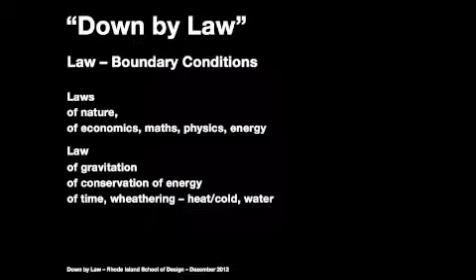How do buildings age? How do we project a city to age or a city to transform in the longer run? So the law I have extended to laws of invisible limits, and I would like to make it specifically before or beyond the formal, because we're trained very well to answer formally how we take a stand towards a project design job, but I think we have to go beyond that.

We have to take a stand on many more issues than just design, and I think that's also ground that we architects have to occupy, because the real estate and the building industry is a heavy industry, and we shouldn't be reduced to just being the guys who do the icing for the cake, but we should really know how to bake the cake and what the ingredients have to do within a cake when it's in the oven.

So the question would be, is the law or the laws, shall it be legal issues, shall it be laws of nature, is this a constraint? Is it a straitjacket? Is it something that makes our work heavy? Or is it a playground? Is it a playground to find niches of intervention? Is it a playground that actually just is a starting point to set out on the voyage for a project? And are laws absolute or are they relative?

They always are dealing, I think on any scale, between public and private interest, in invisible acts of intervention, acts of intervention over time. As I said, the projects have spans that sometimes go beyond a lifetime. It can be from the city fabric to the community, to the neighborhood, to the house, or vice versa. And at the same time, this negotiation for the intervention is the cultural act that we architects are very privileged to contribute, and that's where I also think it's important that we do take a stand.

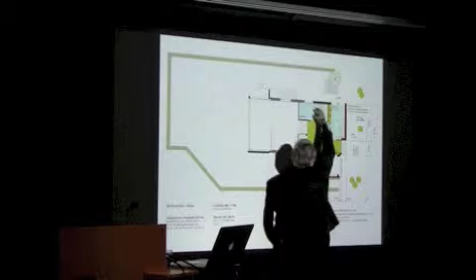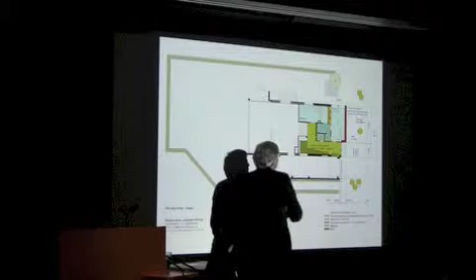So I had a very hard time working with the existing structure to gain 2 extra children's bedrooms with their own bathroom. We had to replace the entrance, which was in the middle. We moved it on the side to have a big wardrobe. But there was a moment when Jan was very dissatisfied because all the structural interventions cost so much money that he felt he doesn't get enough room for the money he invests.

My fee sort of was exploited. I was getting unhappy doing all the work and he's not happy with the job. So eventually we had a phone call, and the phone call resulted in us shouting at each other. I got very upset because he had criticized my work attitude proposing the intervention into the structure, which touched me emotionally very much, and I just burst out,

Jan, the only thing that we could do for you to satisfy would be, we forget about the shit we have done so far. You don't want an extension in your house, we just do a provisional project. Your kids are now teenagers, they'll move out in 7 years, we do a project for 7 years' time, and then you throw the wooden bin away. There was a silence on the other side for about 30 seconds.

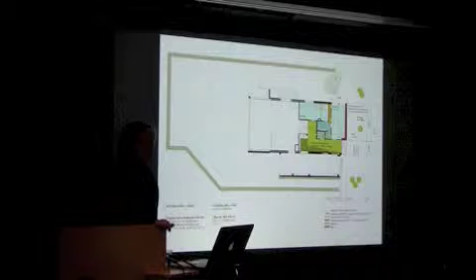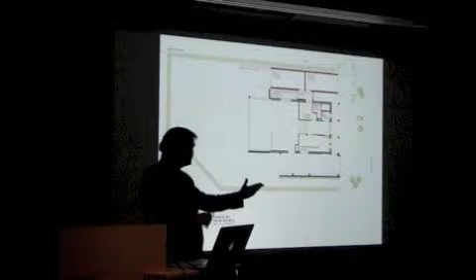Stephan, that's what we're doing, that's a great idea. So I started negotiating with the community to say, look, this guy's got a family problem, he needs extra rooms, he's your village doctor. He doesn't need that for the whole future life of this house, but he needs it urgently for the time now.

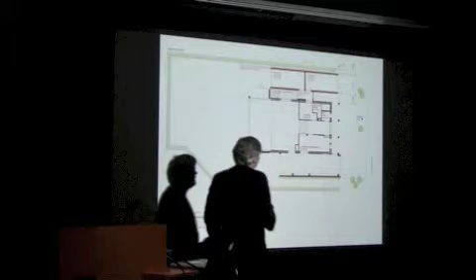And I could negotiate with the community to get a permit of exception for a provisional building for 7 years, which eventually was this volume that we could add laterally. We could keep all the existing structure, which basically saved the money so we could already buy the prefab element.

I decided to go to, if I translate it to English, a box factory. It was a manufacturer who had a reputation to ship big machines from the machine industry in Switzerland overseas. And they started doing prefab houses, so I said, I'll just buy a wooden box. We dimensioned it to whatever we could squeeze in the garden.

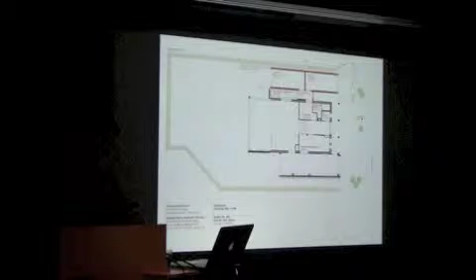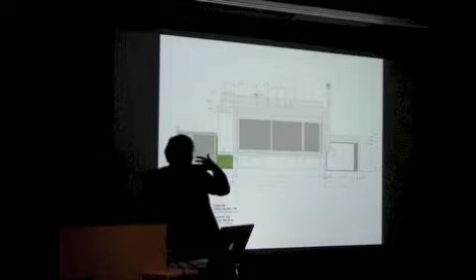The community said the green line, the hedge, we should not touch, but we can build up to the hedge, which basically dimensioned the space that I could bring in the rooms. And with the provisional permit for 7 years, we got the go-ahead. And in a way, it completed the conception of the first phase, having a box, if I may say so, in front, which was the living room added.

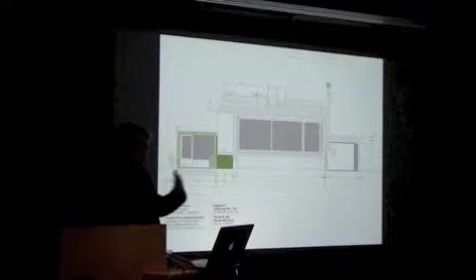On the one side, the garage element added. And now, for the limited time period, the provisional children's room. And he's really thinking now, maybe he might ask the community for an extra 2 or 3 years, but he already has plans what he could do with the box once it has expired its lifetime.

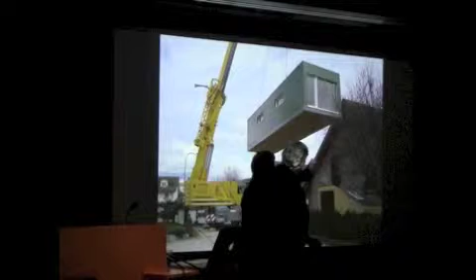And what was exciting really was the way of construction. The box was prefabbed in the factory. We went to see that. There is a sort of a joint piece that covers the external stair going down to the cellar. This would be the entrance into the existing house. We also had to watch that when they lift in the box, they don't break away the roof. So this sort of distance box helped us with that.

The foundation was very simple. It was 12 holes with cement cylinders filled with concrete, put the box on it, and within about 3 days they could use the boxes. The inside took a bit more, but within 3 days, the girls had their rooms, and the girls were really, really happy with it.

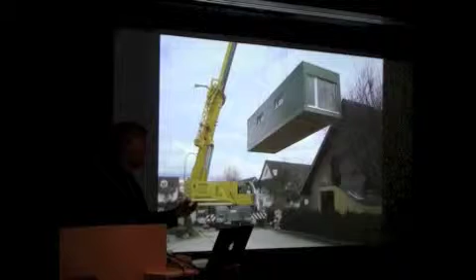The whole box is a very simple construction of OSB board beams, and the OSB board is sort of waterproof and vapor dense, so that was just cladded to both sides. The outside was painted green to fit the buxus hedge, and the inside I left OSB also because I thought teenagers, they want once a black room, pink room, and both girls were very happy that they could do whatever they wanted with the room because that's going to move away, and the parents let them do it because it wasn't the house, it was just the provisional building. And so that's how we solved the borderline issue.

The next project is skipping in scale completely, which is probably the largest building site in Zurich. There was a short list of 8 teams to look at the development site called Glattpark, that's in between Zurich on the way to the airport. Glattpark is a huge development area where they try to place international firms. Kraft Foods is there now. They try to house people there. And the original project had

anticipated 3 phases. And the city wanted to have a test of the special zoning law they had put in place. There was a lot of pre-planning to start the project. And when they eventually started, they realized that the guidelines, you'll see that later on, weren't what would start the site. So in order to be able to start to construct, they started to give themselves special permits beyond the new building rules to be able to start to develop.

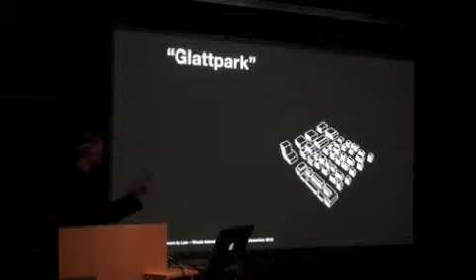And then the community thought that it might be advisable before they start the second phase to retest the special zoning law that they put in place and see how that could be adjusted to maybe make a better total development. For me, that is going on the law and exception. You have something that is installed as a special zoning law, but to start it, you already have to give the exception to the exception building law, which is somehow a very awkward situation.

I said it was a public client, the biggest development site sort of in the area of Switzerland, phase 1 nearing completion, and the building permit was based on exceptions to start development at all.

And what we were trying to do is, I worked with a landscape architect, and in our collaboration we were immediately convinced that we have to take not the law as it was given as our guideline, but to knit on what the first phase started doing, so that we would make it complete in that sense, and not to go into a game of right or wrong, but into a game of permanence, of whole.

And that's why we were using the ideas of knitwear, the pattern where you knit, but you have to deal with the edge, you have to deal with the arm, you have to deal with the neck. And that's probably the special parts, but we wanted to make it as a whole.

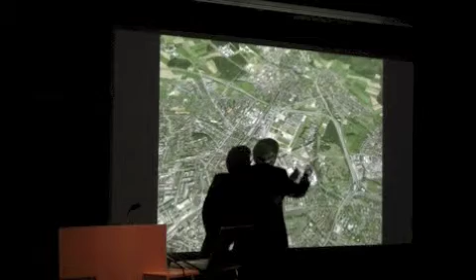This would be an aerial view, and if this is leaving the city of Zurich, and on top of the map would be the airport, it's all of this, with already a park that they had decided to reserve land, with an artificial lake that they started out, and the first phase would have been all of this, second phase here, and the third phase was this rest lot. And you see there is one big block, there are sort of linear buildings here, and then here several buildings, but they form chains towards the artificial lake.

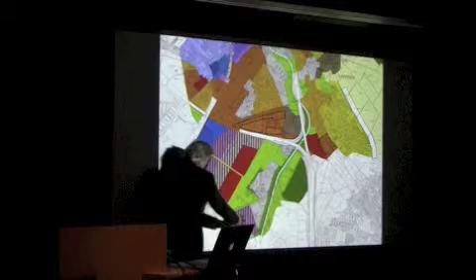This would be the legal plan behind the whole development, saying phase 1, phase 2, phase 3. For making a contribution to the public, the landowners had agreed with the city that they would do this park. It was an international competition. An office from Berlin had won that, and they were actually building the park and the pond before even the housing started.

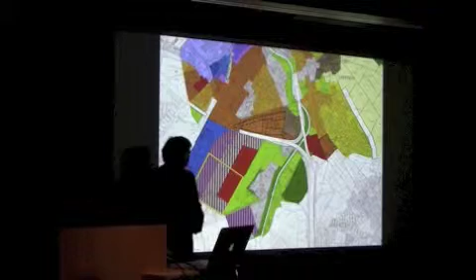Then they were thinking that what is red should be housing, the light blue should be mixed use, and the blue would be office space. And in the first phase it was already clear that all of the mixed zone was completely housing, because in Zurich they had programs of 10,000 flats a year. There are about 80,000 foreigners moving to Switzerland, which is, compared to 7 million people, a lot that the city has to digest every year.

And the office market had been saturated in the early 90s, so there is a lot of office space available, but housing is really a shortage, and basically you can build whatever you want and most of the projects go. So it's really important, even though real estate developers want to go fast, that you are sort of counter-working and try to achieve more than just the number of flats necessary.

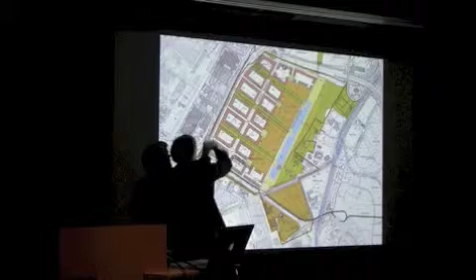And we found, to our surprise, that the city had wanted like a 19th century city with what we call in German Blockrand. I don't know the English expression, but perimeter block. Perimeter blocks, okay. Next to saying that it should be a perimeter block development, they had a linear axis with a boulevard and transversal connections from the park to extend the park landscape up to the heavy main road, where there are 3 or 4 lanes of traffic, and the new tram line that goes from the city out to the airport. So it's really growing fast.

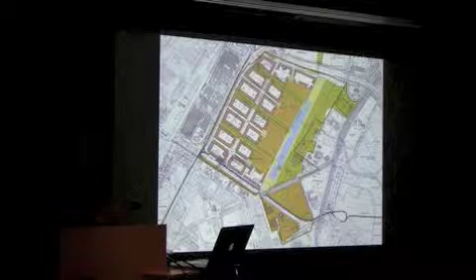There's a lot of traffic, and probably that was why they wanted to work with the perimeter blocks, but we were not satisfied in just using that fabric of definition of public space. We thought that the city has to achieve more than just building this pattern.

So what we did is, as I said, in terms of knitwear, we referred to a period of work by Issey Miyake in the 1970s, where he wanted to achieve clothing out of one piece of cloth. And we thought that was very challenging to understand. How do you have one piece with all its edges, with all its exceptions, but to have a fabric that goes to satisfy the whole development?

So when we started designing, the city had invited 3 teams, and 2 teams had already built on site, who were responsible for the housing that you saw up there. The study job was with intermediate presentations. And the strategy of these 2 offices was to do a second phase that would be completely different. Point houses, different densities, different park landscape.

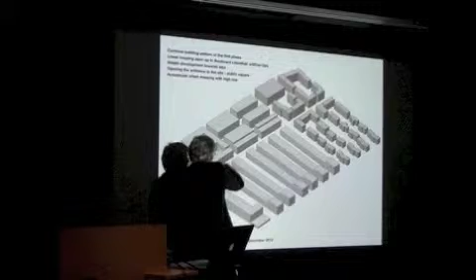And we thought that would be a strategy that makes phase 1, phase 2, phase 3, but the city itself wouldn't come together. So the first assumption we made was to say, where there is housing, we continue with the linear buildings that link the boulevard to the park. That should also make a link so that the public space of the boulevard gets more emphasis.

The second element was that we did not believe in the perimeter blocks, but started modulating volumes and surfaces that are much more occupiable for big companies if they want to do office space. So we had to have the notion of how can we care for office space that would actually be occupied or sold, and at the same time we tried to have a mix of functions.

So when this zone before was only for office, we also postulated that especially along the boulevard, these front blocks should be as well flat, so that if you're there as a citizen, you don't walk a street that is full of light on one hand at night and the other side is dark because people stop working there. And you see very well how we attach to the first phase that was mostly accomplished.

And then we started specifying the rules for these linear parts between the park and the Boulevard Lilienthal. And it's important that you understand these figures. These were never meant to be the buildings. These were meant to be envelopes. Envelopes in which a project has to behave, so that it's like a common rule of game.

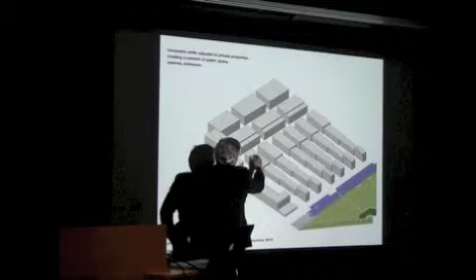If you have the front, you may do a project within this volume, but you can't set it here. You can't set it here. These parts could be deeper, but you can't occupy the public space. So basically these were like positive, negative shapes where we defined access, where we defined traffic, where we defined park areas, and volumes within which the square meters could eventually be consumed.

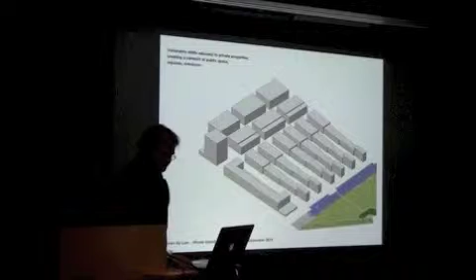Once we had done sort of the gross massing, we started overlaying it with the private properties, and you'll see an image later on, but all here, these are private perimeters. And we wanted to develop a strategy that each one building contributes to the whole, but the single landowner does not have to negotiate with his neighbor to start construction.

So we try to have something that is a total fabric and at the same time works for the individual, so that each investor would be independent on his own decisions to start building, to see what kind of building, and that's why it was important to adapt the massing and the reservation for building and public space exactly to the boundary lines of private property.

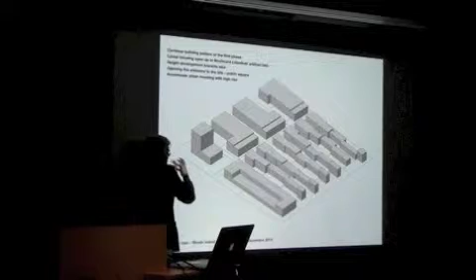And then one move that we thought was very, very important to us, we wanted to work the office mass with the high heavy traffic road, that at the entrance we wanted a much more public appearance for the city fabric. There were 2 new tram lines with important tram stops just right at the edge, and we didn't want to use the perimeter block to occupy up to the street front.

We wanted the mass of the building square meters that could be consumed to recess in a similar maneuver, probably like Mies van der Rohe's project in New York, that there is a public space in front of it and access into the area from a public space and not the street front. And then the final stage was the inscription of different building typologies into what we had defined as the urban massing.

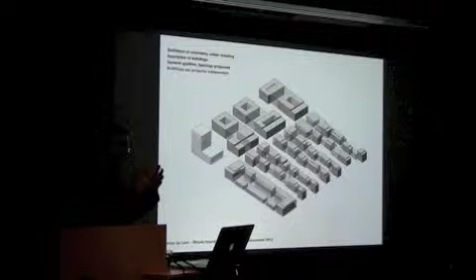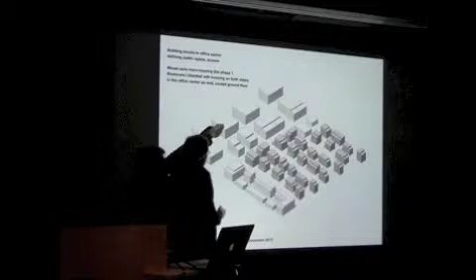Which eventually resulted in possible volumes within the building mass, trying to exploit view from the park. The original building code had foreseen that the highest building should be at the street and they should eventually step down towards the lake, and we thought there should be a better emphasis if what is at the lake could also go higher up. There is a great view into the mountains even, and we wanted to have more depth for these buildings so that there are always lateral or diagonal views possible for each building to participate in the wider range of a public space and not only what is happening just around the house.

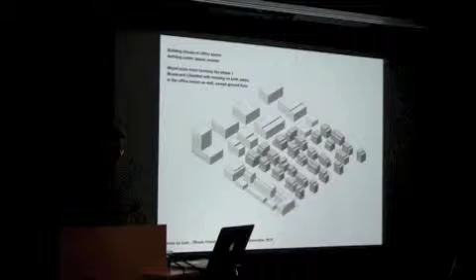So we tried to convince the city that it's a good strategy you started. If you do it by exception, that's fine, but you have to keep on knitting it to make it a whole with possible exceptions or extensions of the law of height, of creating the public space for the arrival area, and how the network of public space was extended with spaces in between the main office volumes for reservations of access to the car parks underground.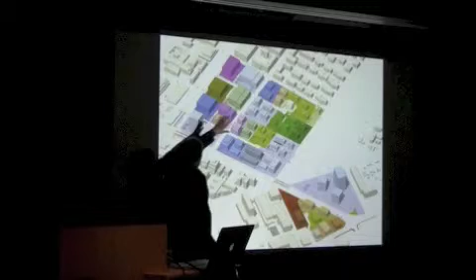But basically finish off the first phase with an extension, with decisions they had taken as exceptions, to apply this to the whole system. And then in the third phase, we thought this has nothing to do with the fabric that we wanted to be completed as a finished knitwear. So we decided to have a different strategy and treat especially this one like an island.

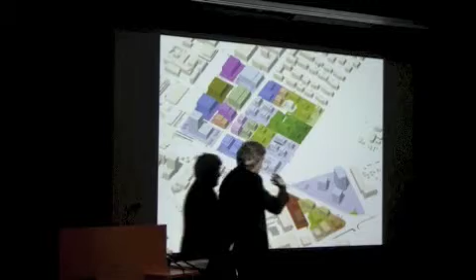We thought this could be heavily planted with trees and create like an artificial island with the high-rise office tower standing out there. And I think it shows pretty well how we tried to approach and make the whole area at the lake appear as one piece.

The city itself, they were very happy with all the results. They had seen two teams doing something completely different, and they realized that they had one proposal to continue knitting, and in the end they realized they couldn't change anything in the special zoning law because they did that job 2 or 3 years too late, and there was no time for the political process to actually change the law, and they just had to keep the special zoning law as they had installed it in the beginning and keep on building with special building permits as exceptions.

So the timing, basically, they were very interested in what they might learn, what they might do as exceptions, what architects might do as a solution, but the political time was not taken into consideration, and you could be mean and say they could have saved that money and invested it in more public space. But for us it was really very, very interesting work. And again, that's why I say this is probably before the formal.

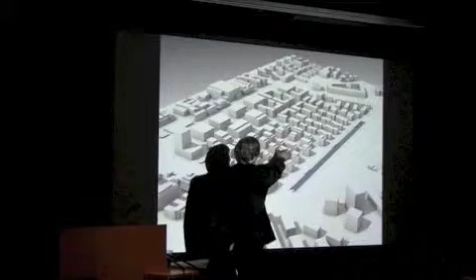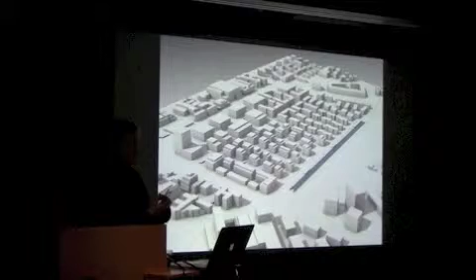Maybe one reference to the typology. What we wanted for this housing, compared to the first phase, we wanted a typology that on the first look looks the same, to strengthen the identity of the site, so that the attic should not be recessed all around. The attic should always reach at least 3 facades. Laterally, there should always be additions to formulate entrances, to formulate bicycle storage, to formulate kindergartens.

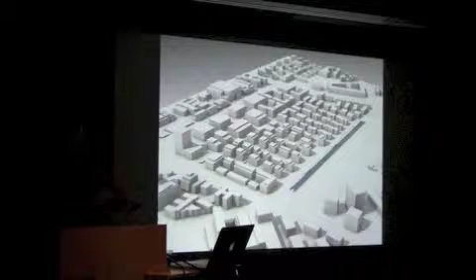But the typology, once established, would allow each house to combine these elements in a different way. So when you look at these buildings on a second look, you suddenly start to see the differences between the different elements. All right. So this was a work that we did probably during half a year. The city consulted, and the second phase is under construction.

The next project I'm going to show you is another political process. It's downtown Zurich. The project, though, the time of intervention is probably in a timeline that we won't get to see what we did. It's about inversion, it's about continuation of public space. The city of Zurich, or the Office for Urban Development, was the client, and Swiss Railway was involved, the local area representatives were involved, the people of public transport were involved, so there were about 12 different offices.

Green Zurich, which is the garden department or the public space department, was involved, and we were trying to negotiate in a very complex field a solution to have a site that could be understood as the entrance of Zurich. You will see immediately in the aerial view, which is actually an entrance, but it's the back side. There was an incision for the railway that was built in 1875 as the back borderline. There were building lines of the 1960s, and in the 1960s in Switzerland traffic engineers had also taken over urban development, so there were building lines reserved to have high frequency traffic right through the middle of Zurich.

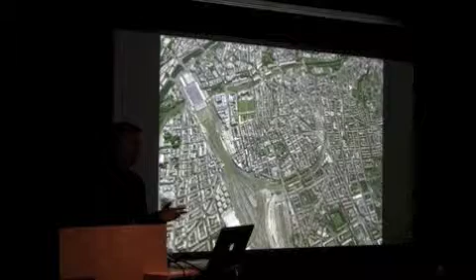Even though I think infrastructure, and that's something that I learned from Jose Acebillo when he did a great lecture at ETH, who said, you know, transformations and development of cities are not done by a single project. They're done by the right arrangement and the right development of infrastructure and public transport, because that's what dimensions the city.

So even the aerial view here, there's a few maps that say this is the sort of the city plan for the building code. The 5 stands for the maximum stories. A, B, C, D stands for special building depths that you're allowed to do. The blue are the building lines. So if you build a project here, you have to build with one facade onto the blue line. But at the same time, this seems a very clear starting point.

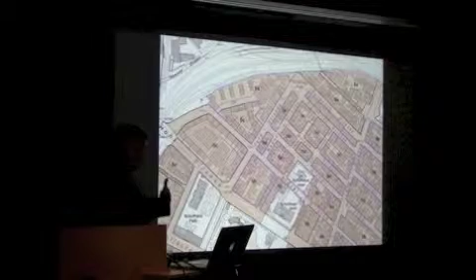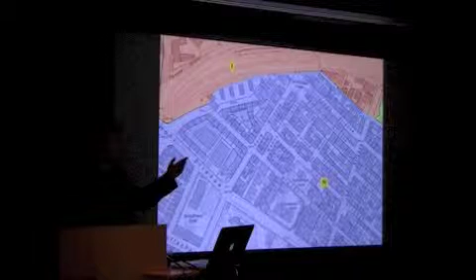At the same time, the same area is in what they call a high-rise zone. In the high-rise zones, there are 3 within Zurich. In high-rise zone 1, the height can be negotiated by the public project or by a competition contribution. In zone 3, high-rise can go up to 40 meters. And in Zurich, a high-rise is if the top slab is higher than 22 meters, you fall into the high-rise category, which basically is not very high.

So the question is, everybody would like to do a high-rise because it would allow you to consume more square meters. Now, how do you negotiate between the city fabric, the private who would like to have a high-rise, and the city who says you can have a high-rise if you contribute to the city? So it's a whole range of negotiation, and if you imagine this on a pattern again, overlay the city structure with private ownership, and you see how many different small portions of private property there were within this context. And it's very difficult to bring that many different interests under one thing of urban development.

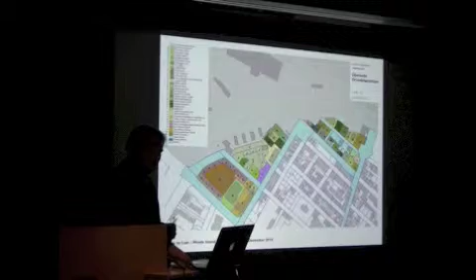So our starting point was the city plan, where you see the violet building line. That was a trajectory for basically, maybe not the highway, but on canton level, the most important hierarchy of street, which would have just cut through the whole area, eventually go through a tunnel and directly out of the city. And due to this legal intermixing between private ownership, building lines from the 1960s, there was no development in the area, because if you owned this house and you wanted to build, you couldn't, because you should be a street.

If you wanted to build this house, and the orange marks that this was not just a house, it was registered for heritage. So basically, if you wanted to build the highway, you had a fight between the people who said, no, no, you can't take this house down. This is heritage. You have to go around us, but you can't go around us because the street is where it has to be. So basically, it was a deadlock situation, and we intervened in that deadlock basically by using the engineer's plan.

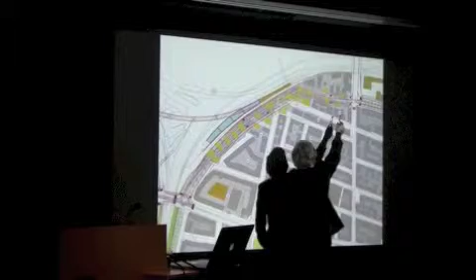The engineers had said, this is ideally what we have. We start from the train station. We have the first stop at the entrance of this area. We drive around with the ideal curves to have maybe a stop somewhere back here and drive out. And at that moment, speed was timed, property was timed, but there was not really an argument on the urban level, and we tried to help them exactly with that.

The first thing we did was looking at these maps. It is an instrument by the city of Zurich, where they look at the relationship between density of housing, square meters of housing, number of people, and how well they are in connection with public space, where everything yellow or light orange is good, the orange is just satisfying, red is bad, and the violet is very bad. So you see that for people who live here, at this area, even though all the railways arrive, they have classified it as completely unsatisfactory. There's a ratio of head per hectare that they have analyzed.

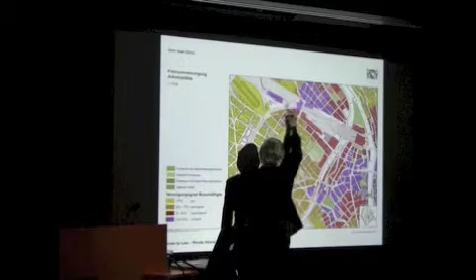The same map, if it's not for people who live there, but for people who work in the area, looks a bit better, but still, especially this area is rather critical.

And right now, the interest was, this area is now a big development. It's going to completely invert the city, and the piece that we looked at is somehow like the missing link to make the whole fabric complete. So we started arguing not by the speed of tram line, by the diameter of tram line, but we tried to argue with intervention.

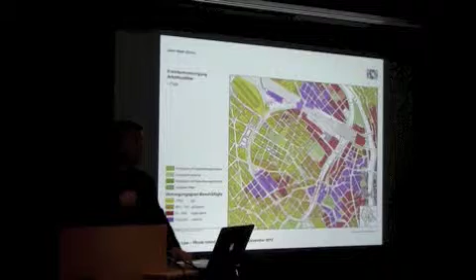And as a reference work, I would like to introduce the work by Roland Roos, Swiss artist. He has a series of work that he called free repair, which means if he goes through the city and finds a place where a hole has been dug out to do whatever underground needed, and it's been replaced in a funny order, he just goes and makes a free repair. And to me that was a very nice way to think about public space.

How can I take a stand of an intervention that is somehow invisible, somehow not authored by formalism, but authored by making something complete. And based on this work, you'll find more examples under rolandrose.net. We looked at a plan that Green Zurich, those guys who look into the public space, have established.

Zurich is a very green city. It's a network of alleys, and they call this the boulevard or the Alleenplan, where everywhere where there should be trees following up the road has been marked, has been labeled, but it's also the strategy plan.

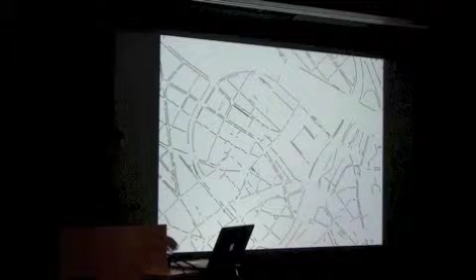And we thought we should make a free repair and just add in the extra circle to make this area a continuation of the public space, and somehow the incision that had been started in 1875 with the railway going here, that these alleys that are in place should just lead the way so that the whole area becomes a public promenade. And once arguing the public promenade, we had arguments to time the public transport, to time the tram stop, and basically constructed it.

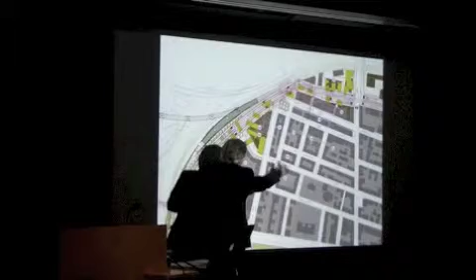We're looking at where would it be best if they need a tram stop, and place it very clearly in front of this building block, so that access would be immediately direct into the existing city fabric, and the different patterns of transport, the street pattern, the public transport pattern, started to overlap in a very orderly way.

And public space would be reserved with a wider range here for the tram stop to cater for a wider number of people, having the edge, since this is an incision, finalized by continuing, as I mentioned, these rows of trees until you enter into the city.

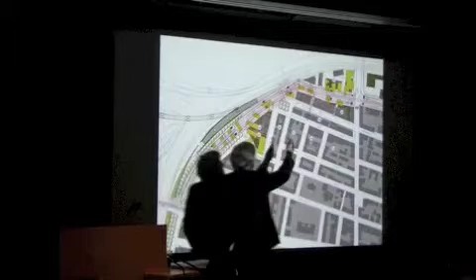And what was also good in terms of strategy is the city was very glad. We managed to slow down the tram line to a different curve, and it was very challenging for us to draw tram radiuses. I mean, we had hundreds of versions, and each version was a different speed, a different angle. We were really measuring how much of the existing fabric in this building block could actually be kept, and we managed not only to save this one, but we could even save the one building in front.

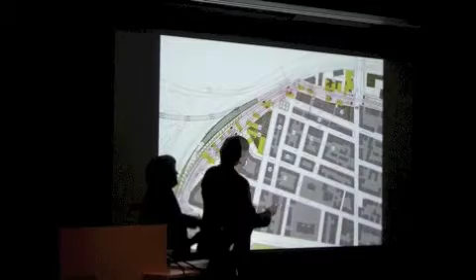And the yellow ones are the ones that either would have to go, or the ones where there were already projects that these buildings should be replaced. We presented it, and we could get the consent of, as I said, the Swiss Federal Railway, the public transport, the city development, Green Zurich. Everybody consented,

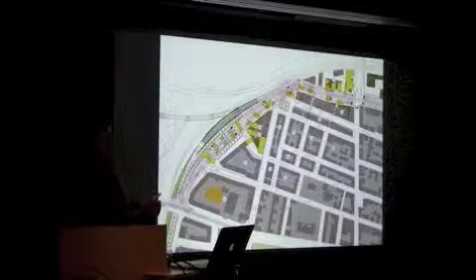except, and that's where this poster is from, the people who live there, because it is an intervention into their living neighborhood. And to change the building lines of the 1960s is a legal procedure. This goes into a public vote. And these people started saying, this is the real estate sharks, these are the people who want to drive the poor people out. And in a way, I have a very big sympathy with these people, because it is a transformation.

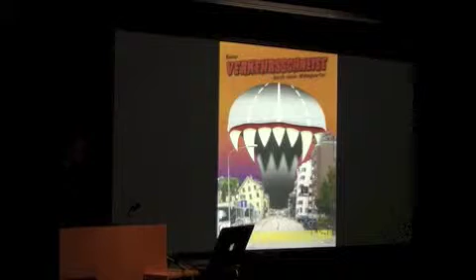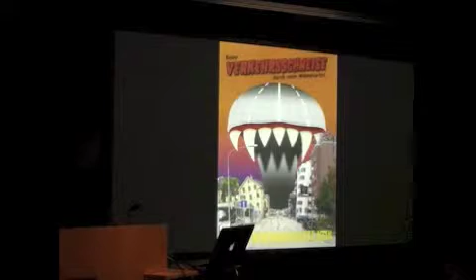But we thought that there was a lot of motivation, if you read the city structure, that it's about the network of public space that would install over time, and would be a contribution not only for the people who live there, but in a wider range to the development of the city of Zurich. So this is how it came to a vote, and eventually it passed. So this is going to be the new building lines. The first few developments have started now, because the deadlock had been ended. This part, which was already projects before, is taken down and is into development.

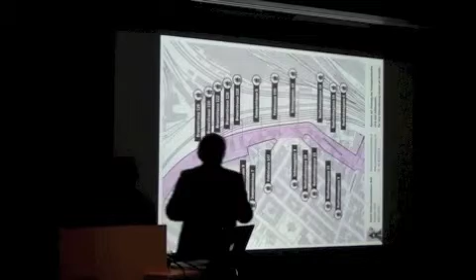Probably I should say this is how they had argued. This is how many houses have to go. But they secretly had also this line, and they didn't talk about the houses that were bound to go if you would realize according to the building lines of the 1960s. So it was actually an evaluation between what can we gain for the city of Zurich, and that was our argument. So eventually I was very happy that this free repair was the base for the new building lines.

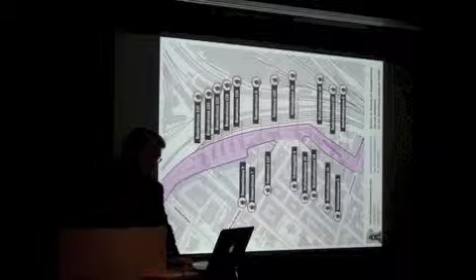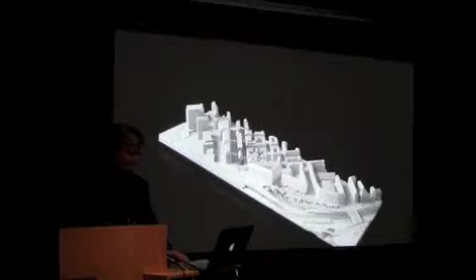And after these very large-scale interventions in public space, I would like to present you a last reference work from the work in the office, which is again under the title The City in the House, and that is sort of the dialogue I appreciate very much, always working in different scales, because the focus and the concentration on different questions is always enriching the discussion on different levels.

It's a private client. The private client had a site. He bought the land. You will see again the aerial views on a fantastic site above Lake of Zurich, with a view from the Alps to nearly the city of Zurich, the Lake of Zurich. It's all in front of you. But when we got to the site, which is up here, you see the Lake of Zurich. All of this development, or most of it, has happened in the last 20, 30 years. There is an incredible amount of building going on.

And our client had bought this property. So you have a very heavy Kantonstrasse in your back with a lot of trucks going by, steep uphill. So it's quite loud in your back, but in front of it you see it's a wealthy area. It's a wealthy area with a lot of nice accessories from the situation itself. This is overlaid with the legal issues again.

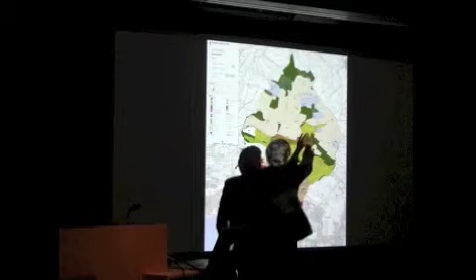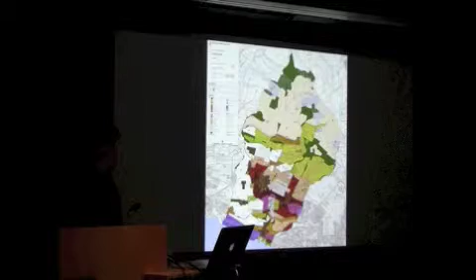The legal planning and zoning law says in this area, the yellow means you can consume 1.1 square meters from the size of the property. So if the property is 1,000 square meters, you could build 1,100 square meters for living. And the house we were commissioned to build on that, maybe just marking the loud street in the back as one of the conditions.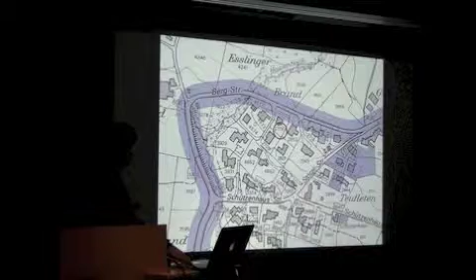The house we were commissioned to build looked like this. A relationship to the garden with a swimming pool as the neighbors have, 3 rooms in the back, living, and then again living, and on the top of the house, 2 bedrooms. Now when I say we were commissioned to build this house, it's a very special situation. We were called in once this house had the building permit, so this is not what we were designing.

There was a moment when I was asked whether I would put in a tender to build this house, I said, I'm not doing this. I haven't drawn it, this is not my thing, it's a terrible house. I disagree with the situation, I'm not moving in. But the person who asked us whether we would want to put in a tender was the brother-in-law of one of my staff who had brought the job.

And the person who worked with me was a very young, energetic architect who had graduated from ETH, but he had so many different interests, from photography to social life, that I thought this might really be the right thing as a sort of a bone for the dog to bite. And I said, Felix, I'm going to put in, but I'm only putting it in if we can say what's wrong with this house. So we made a tender and said, look, there are structural issues that are unsolved.

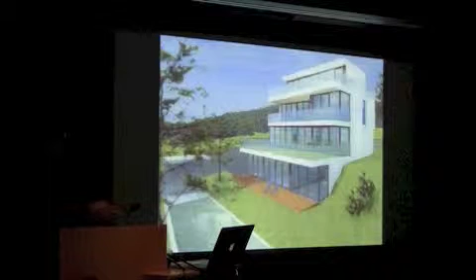I don't want to be responsible. There are issues for the thermal enclosure that aren't solved. There is a problem of the situation. There's a problem of access. And if you don't hold me responsible for those circumstances, that's the bid that we're doing. And to my surprise, we got the bid. So all of a sudden we started to work, and I had to get rid of that image, and we eventually started understanding the house better.

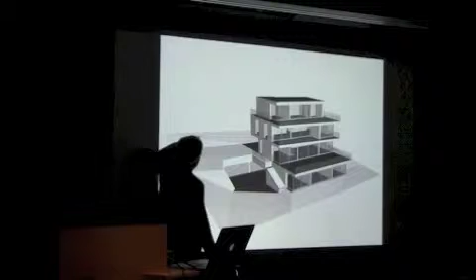And one of its terrible defects was the garage. You had seen the situation with the road at the back, the private access on the side, and when you park your car in the garage and close the garage door, you were standing outside again.

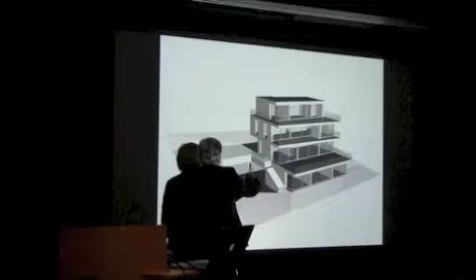There would be the possibility to either go upstairs here, or you would enter into the house and go to your lower flat. But if you were the one in the upper flat, there was a way through the house, inside, outside to the back, upstairs, outside, inside again to go upstairs. And the house didn't have an elevator.

We started, as I had said, I don't want to be responsible for that. We do the execution drawings for you, and I hope that Felix would make his decision on the way of this project, whether he wants to be an architect or something else.

Just about at this stage, when we had rebuilt the whole thing to start the execution drawings, the client behind the project, who wasn't his brother-in-law, but a couple that had bought the land to take the old house down and build new houses and make profit of it, stopped because they couldn't sell what they had planned before, and asked us, could you come in and make proposals for adjustments, to make improvements to the house.

And we did, and the client was very feverish for these changes, but when I reflected on the house, I felt I'm just doing plastic surgery, but the house isn't the right house for this site. So while we were somehow doing the plastic surgery to convince the client we have something to contribute, retrospectively in the office we did a new project, and that completely changed my position, the stand I had to the project. First I thought it's a coaching job, and now I was suddenly emotionally involved.

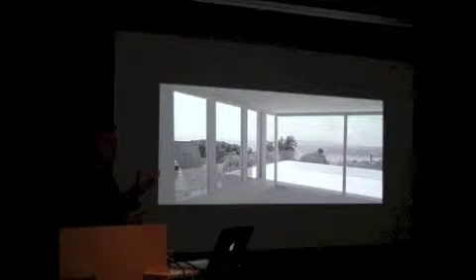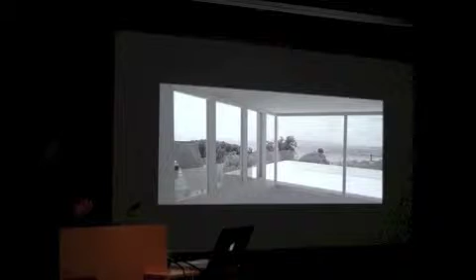But much more, I felt, how can you have an attic with a little terrace, with a bedroom of 16 square meters, with another bedroom of 15 square meters, 2 bathrooms. But actually that's where I felt it's like an eagle's nest. And why don't you exploit the side that on top is where you live? And with images like this, we started trying to convince the client that he should inverse what he had anticipated before, and that the garden is one, but the view is the other.

And I'm against projects that only are oriented to the view outside. There's so much of an internal view as well. But in this situation, it was very important to negotiate the city in the house, to get that as a sort of spinal cord for the project. And with these two images, we could convince the client that we start not only doing plastic surgery, but he accepted our new proposal for the total massing. So one of the things that we did very quickly was inverse the situation of the car park.

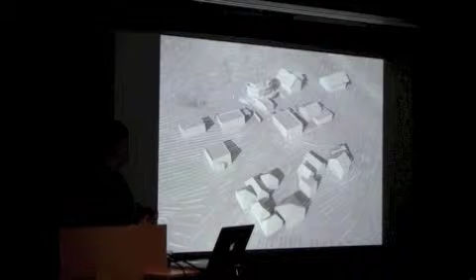Instead of digging it into the hill, we said we could actually use the volume of the garage, one, to separate between the private garden and the public access, but at the same time, this extrusion off the ground would actually suddenly give the lower flat such a big terrace that it's not only the privileged guy of the upper flat who has a great spectacular terrace and view, but also the lower one who before was a bit underground, a bit hidden behind the neighbor. All of a sudden we raised the lower flat onto a platform so that they both have equal qualities.

And the second maneuver was, in a way, like a peacock throwing the feathers. Most neighbors had blocks, flat roof, and I imagined it more like a sun watch up on the hill, that if it had the spinal cord at the back, or the wall, you'll see that afterwards, shielding off the noise, the rest of the building should present itself in the skyline of the hill like a solar watch that would actually make the daytime readable through the different projections of shadow. This is how the house would be organized.

You have the access into the garage. Now the access is direct from the two car parks each party has into the staircase. It has very centrally an elevator, and the story was that the client is, as most clients are, a very difficult person. Now, I could say he's a difficult person, but probably I'm a difficult person too. And so we really have to negotiate between these circumstances. And there was a moment where we had the elevator not very central, it was lateral, I wanted it at the back side, and I thought this is perfect for 2 flats.

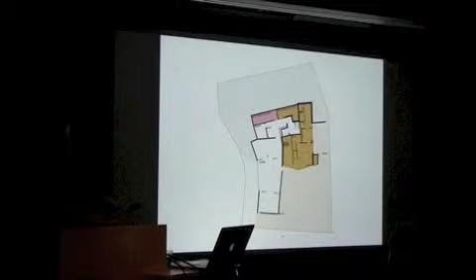But since the first project didn't sell, the guy had already invested and maybe lost a bit of money. He thought it should be good enough for 3 flats. So to rework a 2-flat construct into a 3-flat construct, I moved the elevator central so this elevator would be capable of serving the number of units that this guy eventually had in mind. It turned out we reworked the project, but the first party who bought was buying the upper part, and that guy said, I don't want only half of the first floor, I want the whole first floor if I buy. So he had already 2 floors gone, and eventually he decided he likes the house so much that he keeps the lower unit himself now, which makes me happy too.

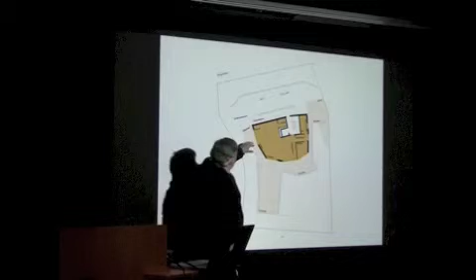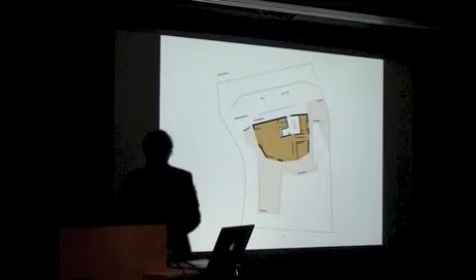But the form itself, if I would have known this in the beginning, I would have said, I'll never build a house like that. But through circumstances, through working into the ground, by sort of inverting the private-public, we really managed something that I found as a surprise myself. With here a huge space for kitchen, eating, living with this terrace. And this side is now the guest wing with a private bath. First floor, attic, and now the view from the top floor from the living room onto the Lake of Zurich.

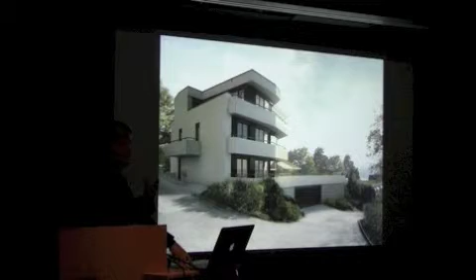And this is now our counter position to the rendering you had seen in the beginning. I do these renderings with a freelancer who is a great contribution to me because he works in a way I would call hyper-realism, but he thinks the building with us, and he was the one who said, this is a house with 3 south facades, and I liked it so much that I would replace the sun clock with the house with 3 south facades. This is how it looks now if you look from below towards the house. We're just about doing the slab at the bottom now, and it should be finished spring 2014.

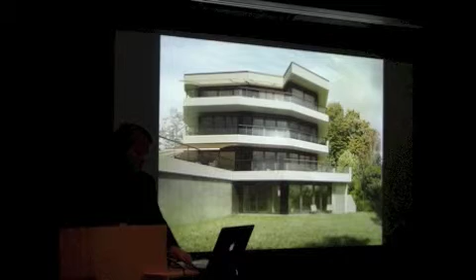So the down by law for me is I extend the law now from what is all constraints, the law of outre noir, beyond the thing itself. Then I try to work in the practice with the law of curiosity, of doubt and determination. I think doubt or questioning is very important, not to fall into the trap of repeating yourself. And each time we try out the law of coherence and completion, that if we manage to answer many questions in a similar way, that is what we strive for. And the promise of working this way is that from the law of outre noir you find discovery. The law of curiosity, doubt and determination spurs surprise, the good and the bad, but it's always a surprise. And the law of coherence and completion gives satisfaction sometimes.

And I would like to finish with a quote by artist Lawrence Weiner, who once had a piece of work that went: bits and pieces put together to present a semblance of a whole. And this is the permanent jobbing we do with our work.